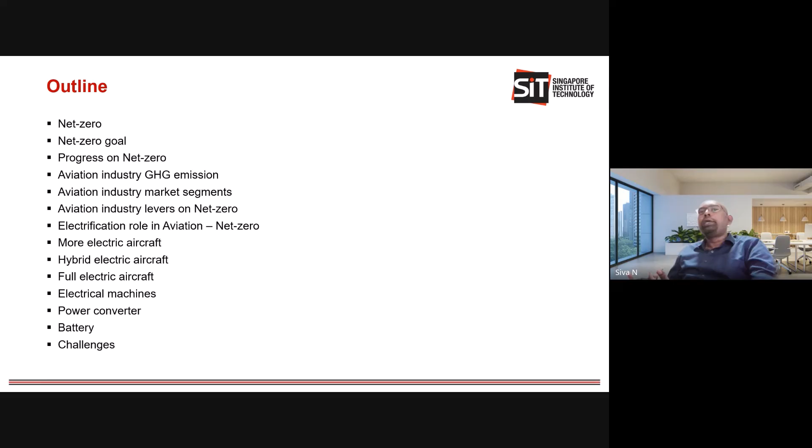Okay, so this is the outline of my presentation. First, I'd like to talk about net zero, why it is important, and following that I would like to talk about the global greenhouse emission from the aviation industry, and then the different market segments and the different initiatives that each market segment is taking to meet these net zero targets, because one solution would not work for all the different types of market segments in the aviation industry. Each market segment has its own strategy and solutions to meet the target. So I want to give a quick overview of how it's being done. Following that, I talk a bit about electrification, especially the more electric aircraft and full electric aircraft initiatives, then talk a little about the electrical machines and converters being designed for the full electric aircraft. Then I'll talk about the challenges, because delivering a product for the aerospace application comes with its own slew of challenges. So I want to give some insight into the challenges an engineer or OEM in the aviation industry faces in delivering a product for aerospace application.

Okay, so with that, let's talk about net zero. I believe most of you might have heard the keyword net zero. This has been a very hot topic in industries now. It's been there for a while, but in the last 5 years it's become more popular, and many industries and companies are talking about this. The reason is that to achieve net zero, regulations are coming. Countries are taking measures to achieve the net zero target, imposing strict regulations in order to meet it.

So companies have to adapt their products to meet this net zero target, and they're seriously looking into it. On top of that, big companies are taking it as a matter of reputation, because if they don't take measures to be more sustainable, they feel they are inferior to their competitors. So the company takes it as a measure to increase their reputation. Also, another reason is that millennials, who are a young working force in industries...

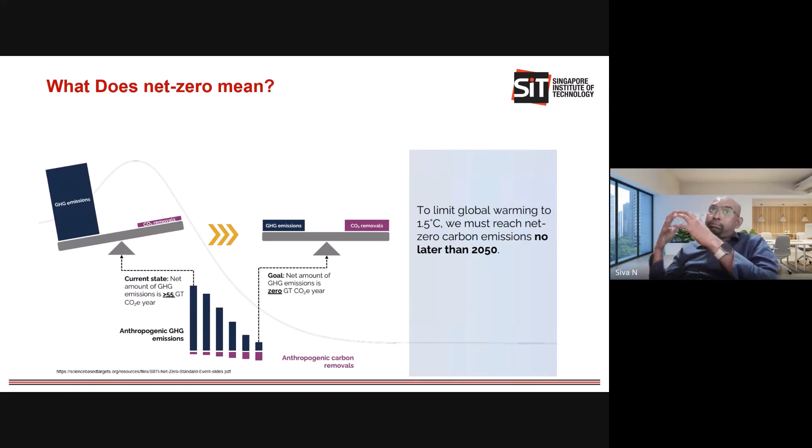That's the scenario we're talking about. Since 1850, we've had an industrial revolution, and we started emitting more and more greenhouse gas emissions, the CO2, into our environment or atmosphere. It's kind of building up. The global greenhouse gas emission keeps increasing, and CO2 removal isn't increasing significantly, because this CO2 removal comes from the forests we have, the trees that absorb CO2. That hasn't gone up significantly—it's been reducing, as deforestation is happening.

So the mechanism we have to remove CO2 from the environment keeps reducing. That's creating an imbalance now. We're emitting more CO2 and we don't have enough mechanism to absorb it. So this is the imbalance we have.

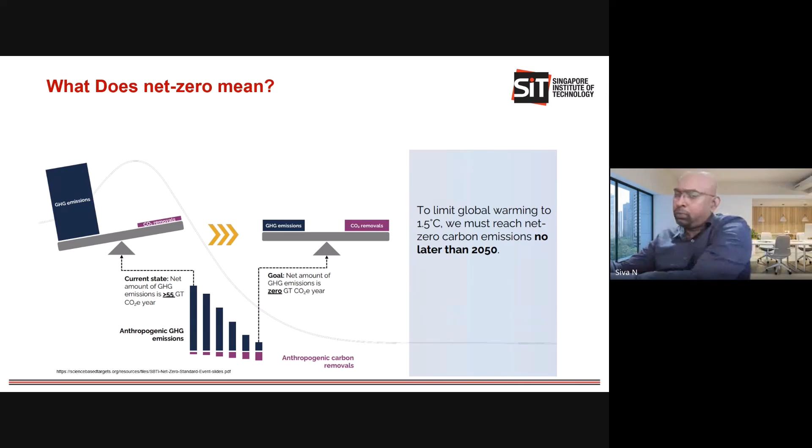If you look at the current scenario, in 2023 or 2024, emissions are about 57 gigatons equivalent of CO2—quite significant. If you don't take any action, these emissions would keep increasing. So the Paris Agreement, signed in 2015, had many countries agree to work together to achieve balance by 2050, like what you see here.

The emissions is equivalent to the carbon CO2 removal. So it's something like, let's go back to the kitchen scenario. You have a stove, wood burning to cook, but you have very small ventilation. So the removal of CO2 from the kitchen is very low, whereas the generation of CO2 from the wood is higher.

So how do you balance it? By putting, for example, an exhaust fan on the small ventilation hole, and if you increase the speed of the ventilation fan, you can suck the smoke out at the same rate as it's being generated. So you're balancing the emission and removal happening at an equal rate, and the environment becomes cleaner.

That's what we want to achieve. But the challenge is we are emitting way too much CO2, and we've been doing that. We can't suddenly find a way to suck all the CO2 from the atmosphere, because with current technology it's not possible, and even if it existed, it could be really expensive. So we need to find a mechanism to balance it.

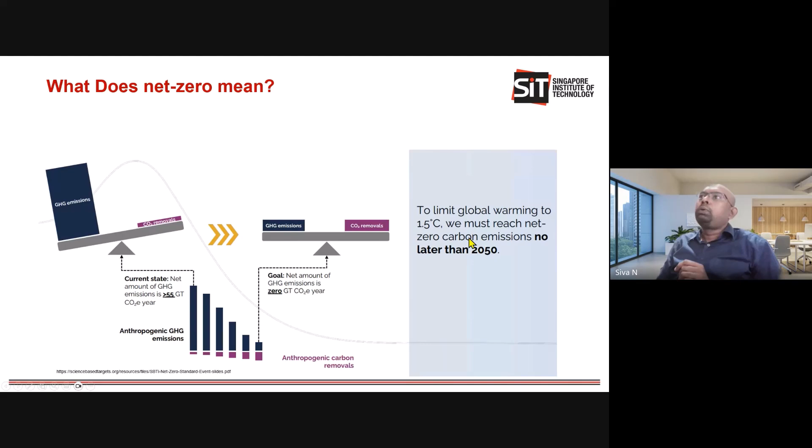The next question is why we have to do it. What net zero really means is that emission is equal to removal. If we achieve this by 2050, we would be able to limit global warming to 1.5 degrees Celsius.

From where we started the industrial revolution until now, it's already been like a 1.45 degree Celsius increase. If you don't take any measures, it would increase higher, maybe to 2 degrees Celsius in 20 years, and then maybe 3, 4 degrees in another 10 years. It will cause a catastrophic effect, because you know about global warming and its impact.

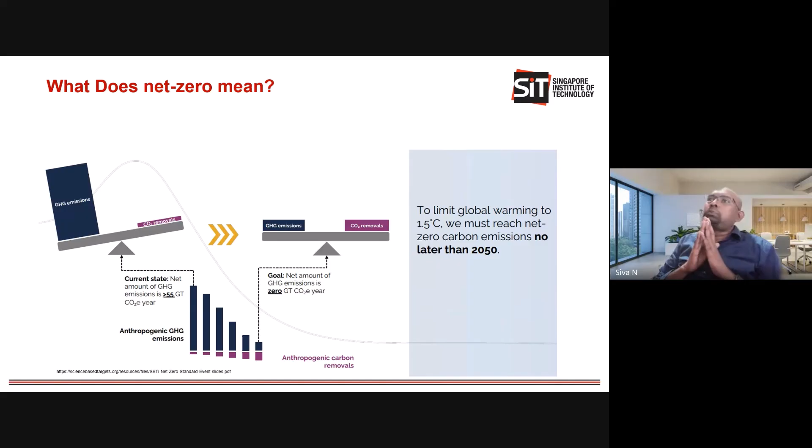So the net zero initiative is to achieve the target of limiting global warming to 1.5 degrees Celsius no later than 2050. That's what net zero actually means — we take initiatives to balance carbon, making emission equal to removal by 2050. By doing that, we can limit the increasing temperature to 1.5 degrees Celsius.

Going back to the kitchen scenario, how can we do that? We can put a ventilation fan to suck and pump the air out, but if the smoke is too high, the ventilation fan won't be efficient enough. In that case, we have to go for another way of cooking — for example, replacing the wooden stove with an induction stove, which doesn't emit any smoke, only smoke from what you cooked. Then even a small ventilation fan can suck the air out.

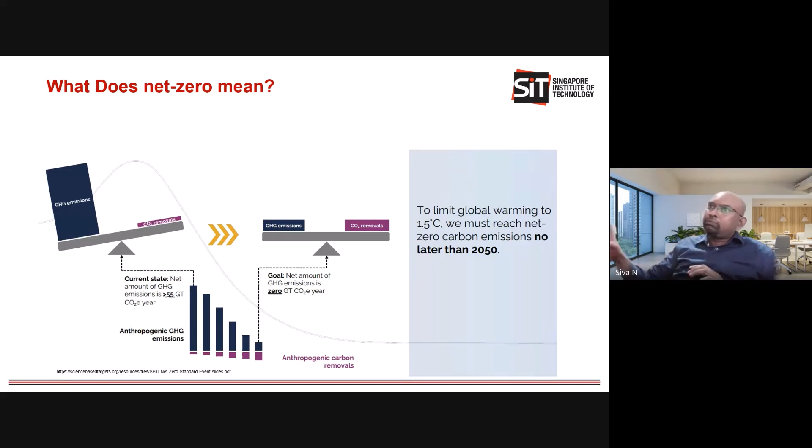That's the analogy to understand that if I reduce my emissions over the years, it's also easier for me to remove the carbon from the atmosphere. That's the balance we want to achieve.

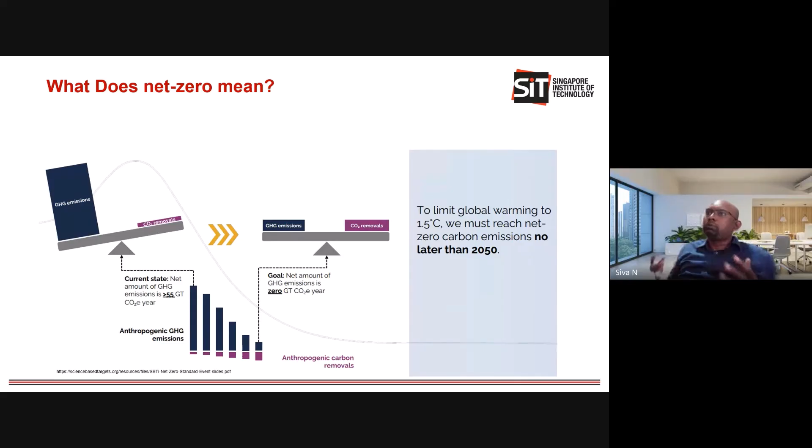I'll talk more about how to remove CO2 — what mechanisms we currently have — I touched a little on that in this slide. So, to recap net zero: the primary goal is to limit global warming to well below 2 degrees Celsius, with the more ambitious target of limiting the increase to 1.5 degrees Celsius.

Okay, so that's the primary goal that we want, the net zero goal. This was agreed in 2015 in what they call the Paris Agreement. It's an international treaty adopted on December 12th, 2015, at the 21st conference of the United Nations Framework Convention on Climate Change, the UNFCCC. Since then, more and more countries have been willing to adopt and adapt their policies in order to achieve this target.

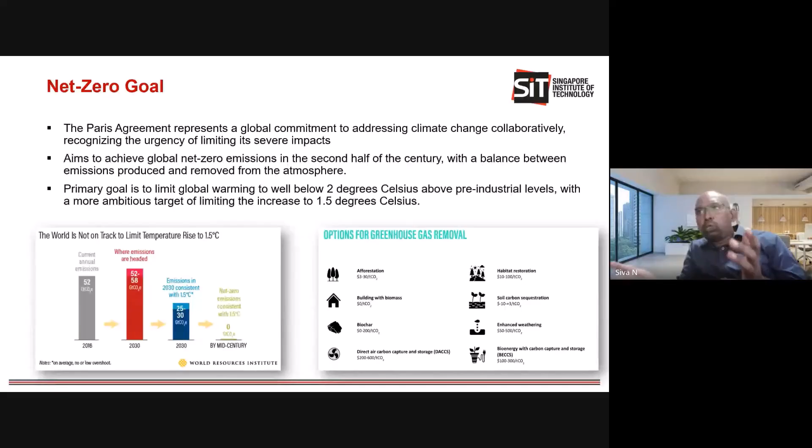And biochar is basically burning the biomass - plants or trees - at a very low oxygen level. It's called pyrolysis. This creates biochar, which has so many applications. It can be used to enrich the soil, as a fertilizer, as a catalyzer. It has many applications. So this is one way of preventing trees or plants from just burning, and instead creating char that can be used.

And direct air capture - this is again an emerging technology, and it has many rationales for being used. Direct air capture works by having big fans suck in atmospheric air, then a membrane filters the carbon from the air, and we use some solvent to dissolve the carbon, and the dissolved carbon is stored. Sometimes it's stored and used to make fuel again, because the captured carbon is mixed with hydrogen to create a hydrocarbon chain to make fuel.

That's bioenergy with carbon capture and storage - that's another technique. You can see these are all quite expensive. And then habitat restoration is another approach - creating or recreating an ecosystem that helps provide clean air, clean water, and natural pollination. That's kind of the natural way of making things better.

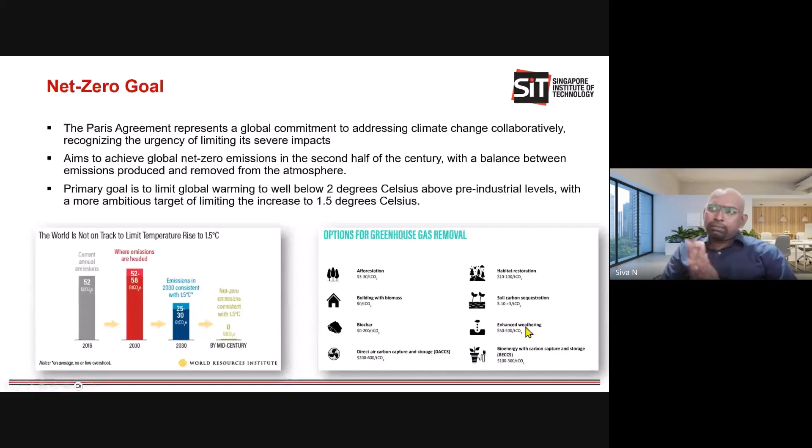Soil carbon sequestration is growing plants or trees that hold carbon in the soil, capturing carbon and putting it into the soil, and enhancing weathering. Weathering is a process that accelerates the natural process of carbonate and silicate, where the carbonate absorbs CO2 from the environment, accelerating this natural process.

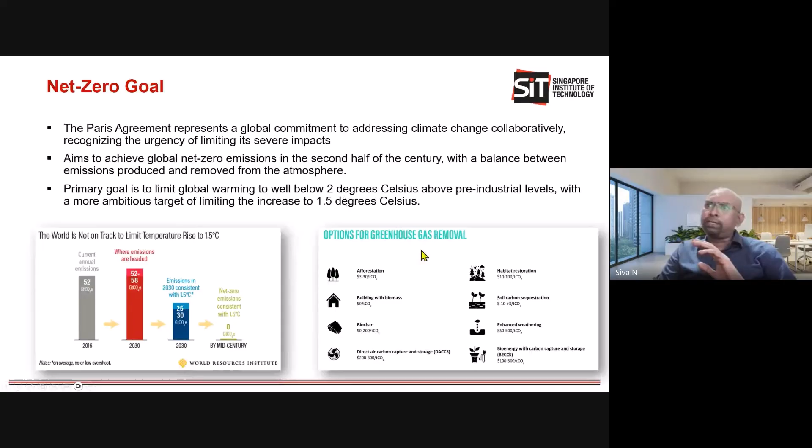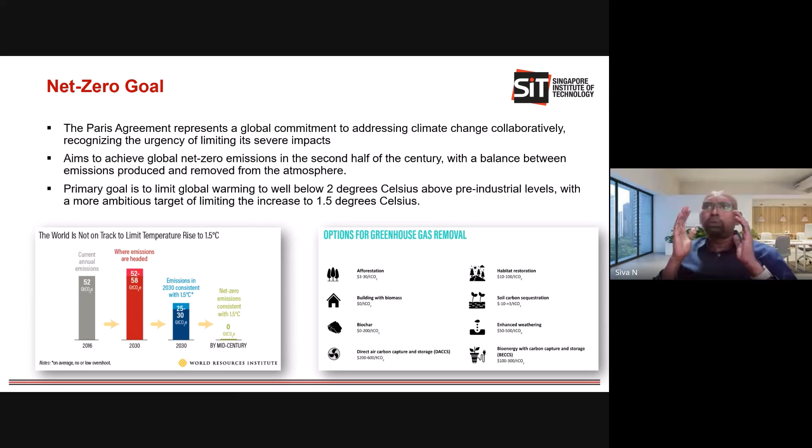So these are different techniques to capture carbon, but they are all expensive, some really expensive. It's not possible to suck out all the carbon being emitted. If by 2030 we emit 58 gigatons equivalent of carbon, we won't have the technology to capture all of it. So we have to bring emissions down so these techniques can help remove carbon and make it carbon neutral.

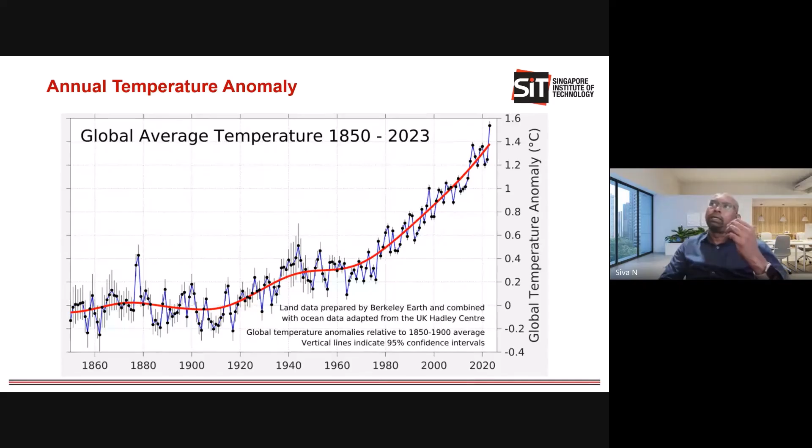This chart shows where we are from the pre-industrial revolution to now on global warming. This is the annual temperature anomaly. We can see that from 1860 the anomaly was around 0, but it's been increasing, and last year it was around 1.45. That's the anomaly we're seeing, an increasing temperature. If we don't take measures, it will go higher and trigger many other disasters.

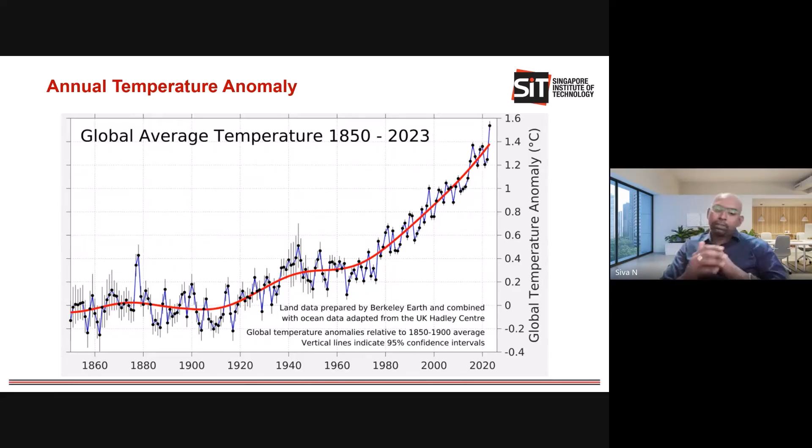That's the reason net zero is important. So we've talked enough about net zero, and countries are really taking it seriously.

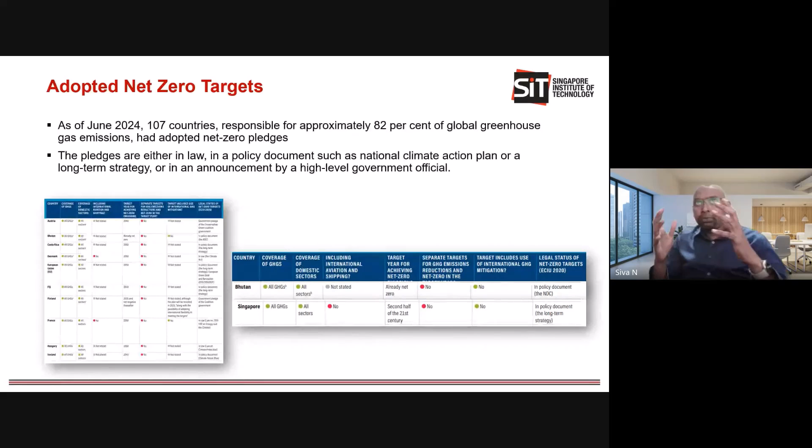As of 2024, more than 100 countries, responsible for 82% of global greenhouse gas emissions, which are the main contributors, have agreed to adopt net zero initiatives, enforcing laws, changing policy documents, or making long-term strategies.

These are some examples of what countries are doing. Since we're in the Asian region, looking at our neighboring countries, Bhutan covers the domestic sector, all sectors. They have policies implemented to take the net zero initiative, and they claim to already be net zero, meaning emissions from domestic sectors are absorbed through some mechanism, maybe more forests or other mechanisms we need to learn about.

Singapore is also very proactive. They claim that by the second half of the 21st century they want to go net zero, excluding aviation and shipping, but for other sectors they want to achieve net zero by the middle of the second half of this century. So different countries are implementing policies to achieve net zero targets.

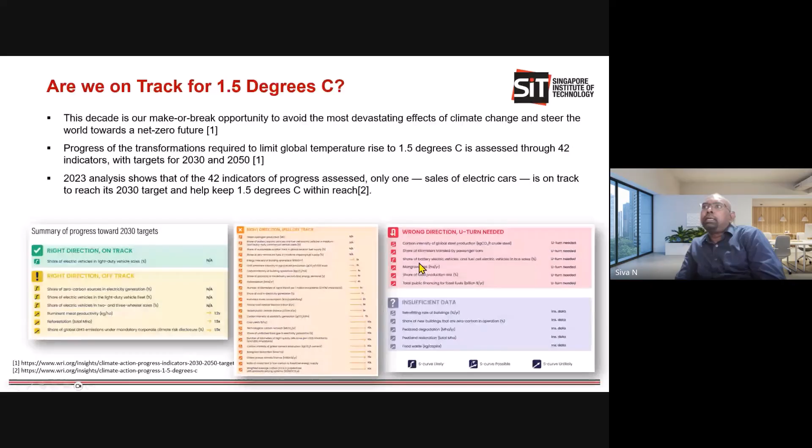Some indicators are going in the wrong direction. For example, global steel production is supposed to reduce the intensity of carbon emissions, but they are actually emitting more. This is a U-turn, not going in the right direction of reducing emissions, but instead increasing them. So this is the status now, and it's one of the main reasons companies and countries are imposing strict laws and policies.

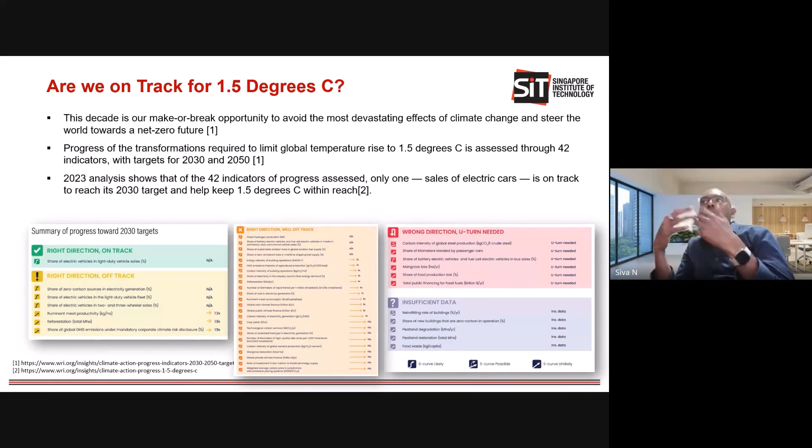So when countries impose laws and policies, it eventually translates to economic reformation, and that in turn has an impact or forces companies to change their products, to take the initiative in order to reduce CO2 emissions, either what their product emits or the CO2 emission they have in their production or manufacturing.

Okay, so with that note, let's look at who is contributing, and what are the contributions, what are the different industries that contribute to the level of CO2 emission. As of 2023, the recorded emission is about 57.1 gigatons equivalent of CO2. The energy sector, the power sector, is the key contributor at about 26% of emissions, and the next big one is the transportation sector, which emits about 15% of global CO2 emissions, with the rest from other sectors.

Since I'm talking about aviation, let's look at the transportation industry. You can see road transport, sea transport, and air transport. Aviation is part of air transport, and it makes about 2% of global CO2 emissions. So out of the 15% from the transportation industry, 2% of it is coming from the aviation industry, which is significant.

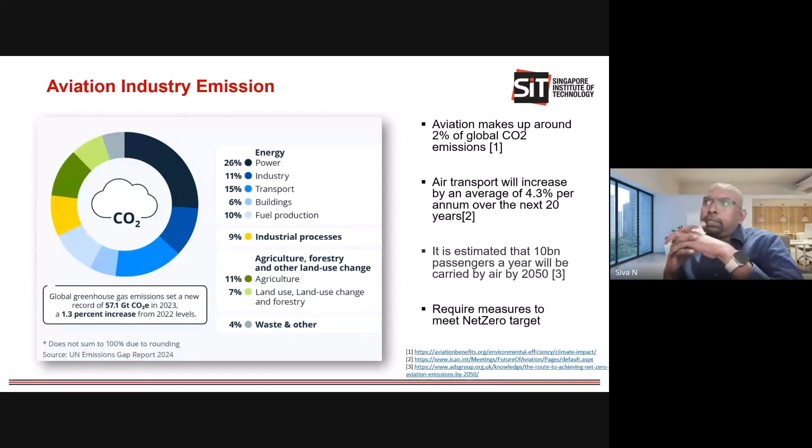It may not look significant, but if you look at the way air transportation is growing, it's growing at 4.3% per annum over the next 20 years. That's the kind of prediction we have, so this is significant growth in air transportation. It's estimated that about 10 billion passengers will be traveling in a year by 2050. This is a significant increase in the volume of passengers using air transport, so there will be more emissions that may come. Over the years, the emission may be more than 2% of global CO2.

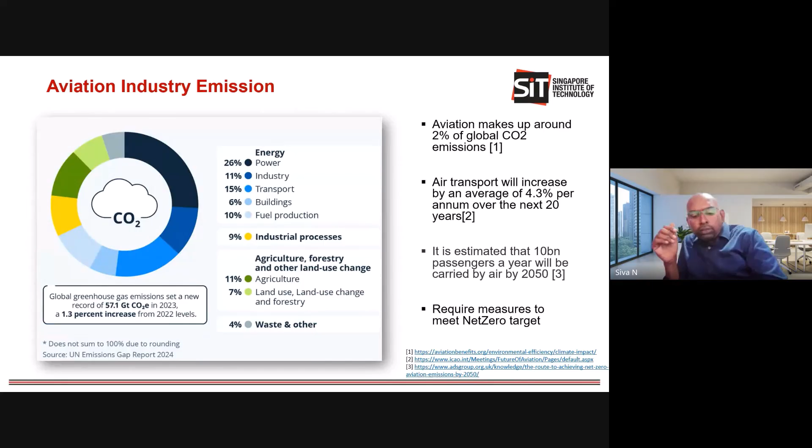So definitely this industry requires measures to meet the net zero target. Let's look at what levers the aviation industry has in order to reduce CO2 emissions to meet or assist in meeting the net zero target. But before that, we need to look at the different market segments in aviation.

These are the 5 categories or segments in aviation. Actually it's not a strict market segmentation—some use 4 market segments, some 5. Here I'm showing the one with 5 market segments, based on the size of the flight. Urban air mobility, UAM, includes vertical takeoff and landing vehicles and air taxis. It's a very short range flight with a 4 or 6 passenger aircraft.

Commuter aircraft is slightly bigger, with 9 to 50 seated aircraft, and it travels more than 100 kilometers. Then regional is 50 to 100 seated aircraft, medium haul is around 200 seated aircraft, and long haul is more than 250 seated aircraft.

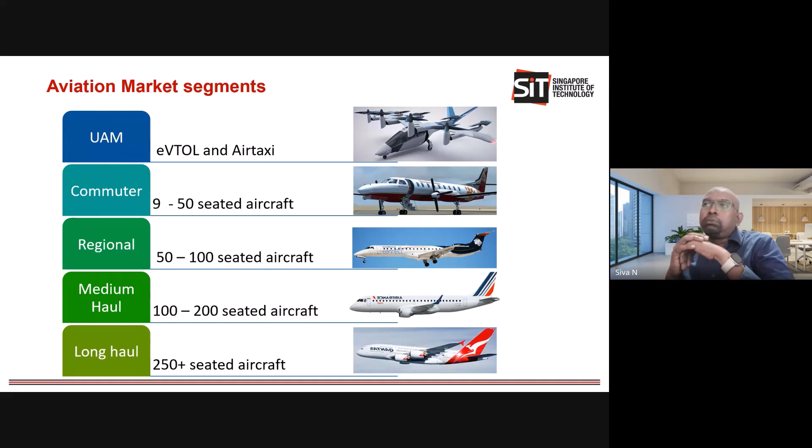So these are the different categories of segments in the aircraft market, and as the size of aircraft used in these market segments differs, the power requirements are different. So one strategy or initiative for CO2 emission reduction would not work for all—that's why we need to look at different levers to reduce CO2 emissions from different market segments.

Okay, so let's look at the levers that the aviation industry has in order to reduce greenhouse gas emissions from the industry to achieve net zero. The first is improving technology. The aviation industry has been around for about 100 years, and they have been improving and growing, but now we want to achieve the CO2 net zero target, we need to take some step improvements in the measures or the way it's been looked at.

So the low hanging fruit is improving fuel efficiency. Fuel efficiency can be increased because fuel consumption is based on the payload—how heavy the aircraft is. So by looking at avenues to reduce the aircraft weight and the power consumption in the aircraft, we would be able to increase the fuel efficiency of the aircraft. Basically, by reducing size, we can increase fuel efficiency.

So that's the avenue that the existing industry, the OEMs, are looking at in order to improve efficiency. And then adapting the next generation technologies like battery powered propellers, hydrogen fuel cells, or innovative aircraft designs.

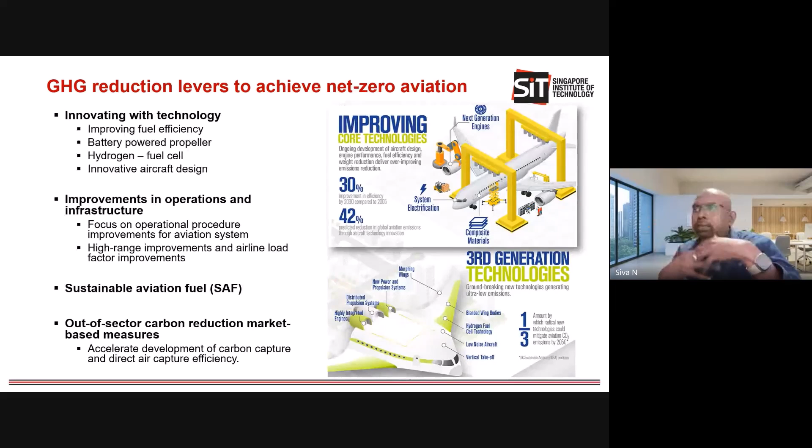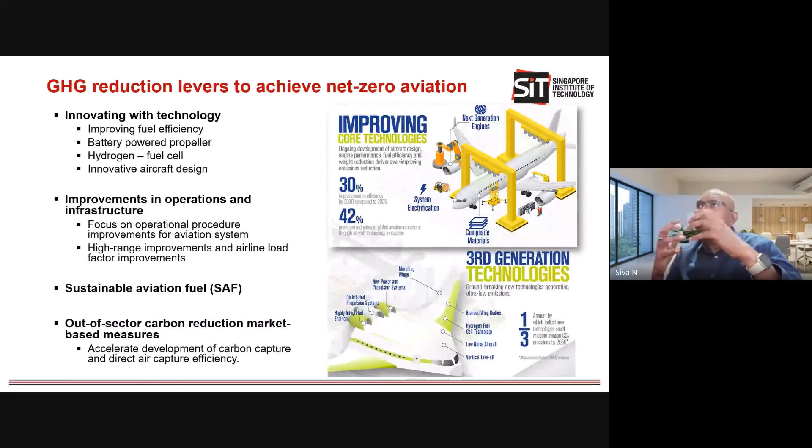That's one lever they use: innovation with technology, to increase efficiency and performance, reduce energy consumption, or enable use of clean fuel. The second lever is improvements in operation and infrastructure, looking at the fleet level - how airlines can operate aircraft more effectively, increase utilization, and improve load factor. For example, airlines can work together to share aircraft to increase utilization. This is some of the strategy being taken by different airlines, adapting AI and predictive maintenance and other forecasting techniques, all put together to optimize operations. That's the other lever they use to reduce CO2 emissions from the aviation industry.

The other one is sustainable aviation fuel - a topic by itself. For a long haul or medium haul aircraft, which is a big aircraft, bringing electrification may bring a slight marginal benefit, but it won't bring significant benefit because the technology is not there - the battery technology is not there.

Or even the motor technology, or the power density we're looking at on the motor or battery, is not there to completely electrify long haul or medium haul aircraft. So one avenue to look at is, how can I change my fuel? Currently kerosene is used to power the aircraft. Can I go for an alternative fuel that will emit less emission or zero emission? Right, that's what sustainable aviation fuel is talking about.

It either uses biomass to create the fuel, or uses a synthetic approach - do electrolysis, break down water into hydrogen and oxygen, and capture carbon from the atmosphere. Take the carbon from the atmosphere, take the oxygen and hydrogen from electrolysis, put them together to create a carbon-hydrogen chain to create fuel. That's synthetic fuel that can be created and used in aircraft, which is cleaner - I mean, may not be cleaner, but it's that we're not pumping crude oil from the ground and burning it and emitting carbon. It's more like we're capturing carbon, creating the fuel, and emitting the carbon again in the atmosphere, so it's neutralizing the carbon emission.

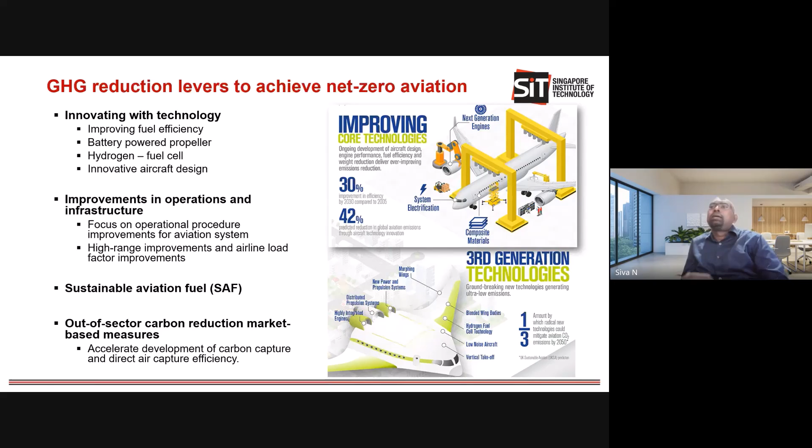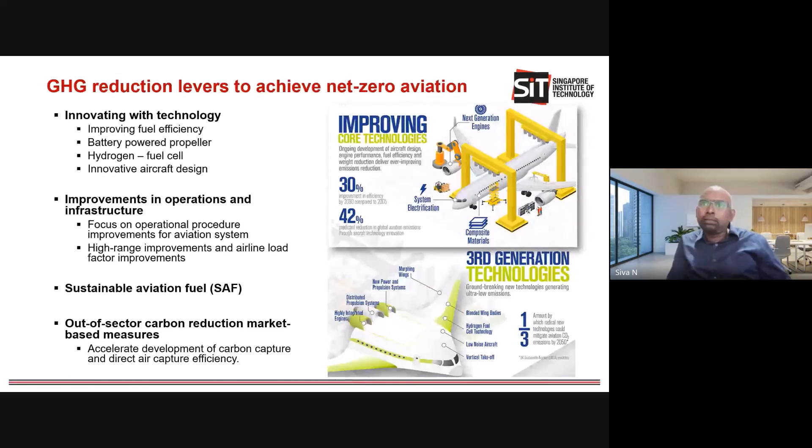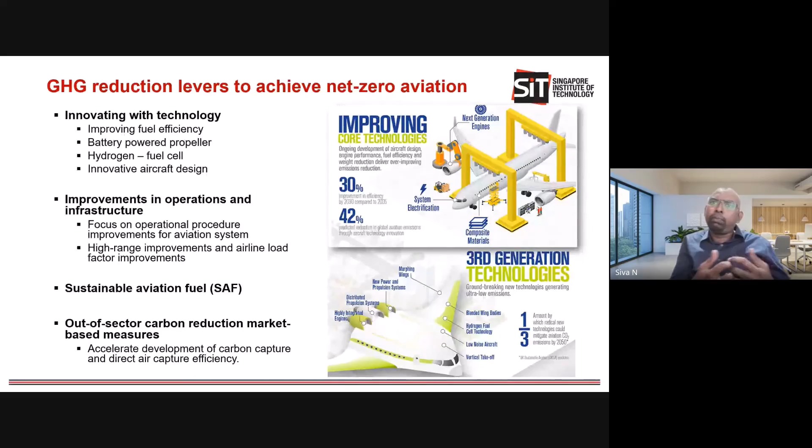Then there's out-of-sector carbon reduction, a market based measure. This is where the aviation industry invests in other technology like carbon capture, direct air capture technology - essentially buying carbon credits. They invest in or buy companies which capture carbon, so whatever carbon is emitted by their product, they use this out-of-sector carbon reduction technology to suck carbon from the environment, then store it or use it for other purposes. So this is another way of reducing overall emission. These are the different levers they have.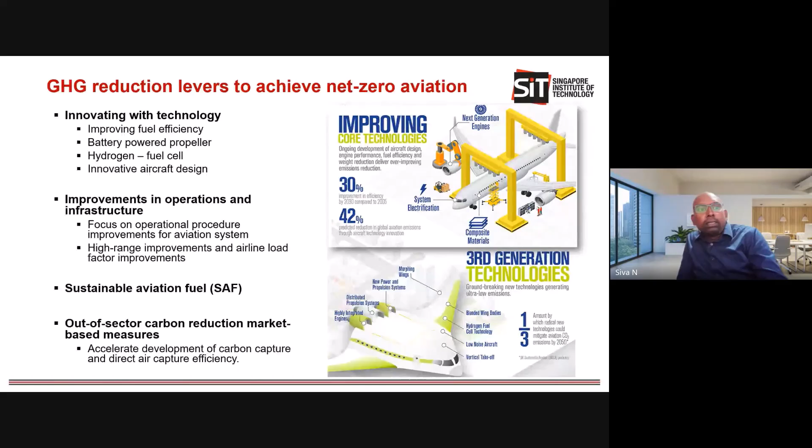Okay, so now let's look at innovation with technology. As I mentioned, increasing fuel efficiency is key - one way to reduce CO2 emission - because if you increase the efficiency of the gas turbine engine, which you see here, by 1%, each aircraft would save about $100,000 or $200,000 per year.

So if airlines have 10 or 20 aircraft, the savings could be in millions. The savings on fuel will be in millions, and then you can think about the CO2 emission savings from that fuel. So that's why companies are putting more effort into making the next generation engines more efficient.

The other approach they're taking is composite material, because as I mentioned, if we reduce the aircraft weight, the overall fuel consumption would reduce. So instead of using conventional material, can we go with some composite material which is lighter and more rugged? A lot of material research is going on to see how we can reduce that, and that's another measure the industry is taking to reduce the overall weight of the aircraft.

And the other approach is electrification, which I'll talk about in later slides. Electrification helps us reduce the weight of the aircraft, because it could help us remove the existing hydraulic and pneumatic systems in the aircraft.

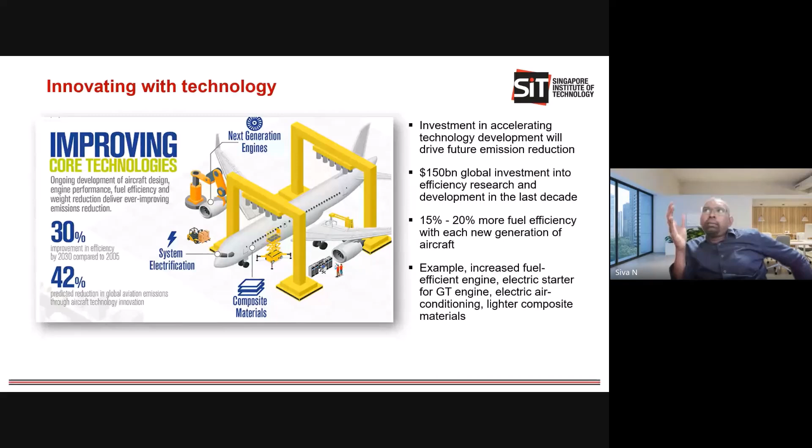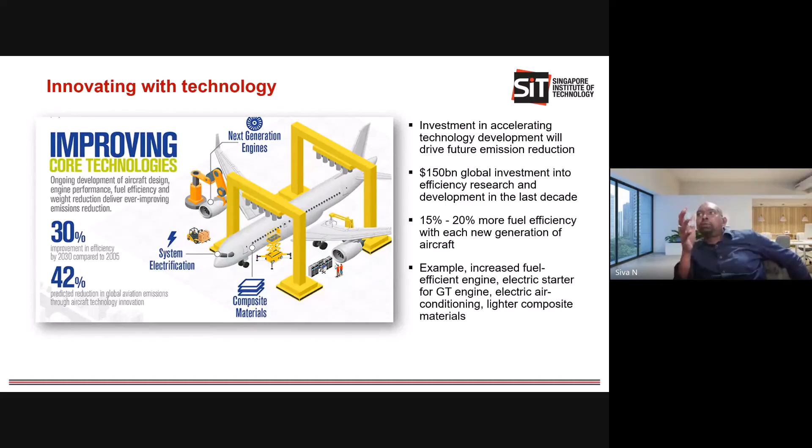Currently, about 150 billion in global investment is going into research to increase the overall efficiency or fuel efficiency of existing aircraft, or the next version of conventional aircraft. This will help us implement all these measures - electrification, composite material to reduce weight, and increase the efficiency of the engine.

If you do all these things, we will be able to see some improvement in efficiency by 2030. That is the target. That would translate to a predicted reduction in global aviation emissions by 40%.

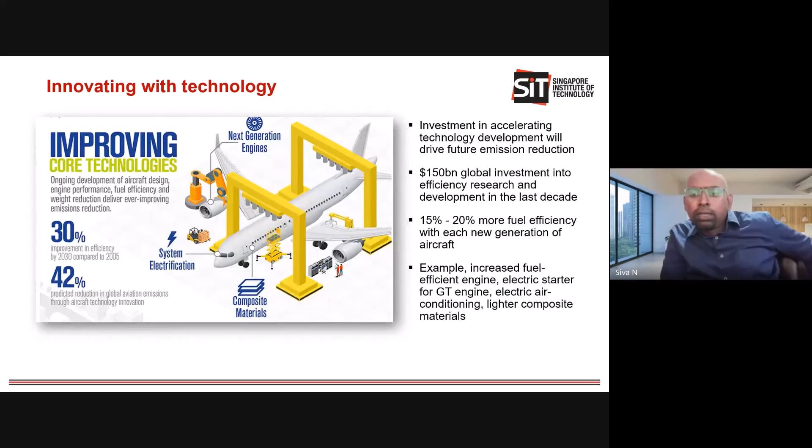So that's the innovation with technology. Now let's talk about electrical technology. This is interesting, you can see that.

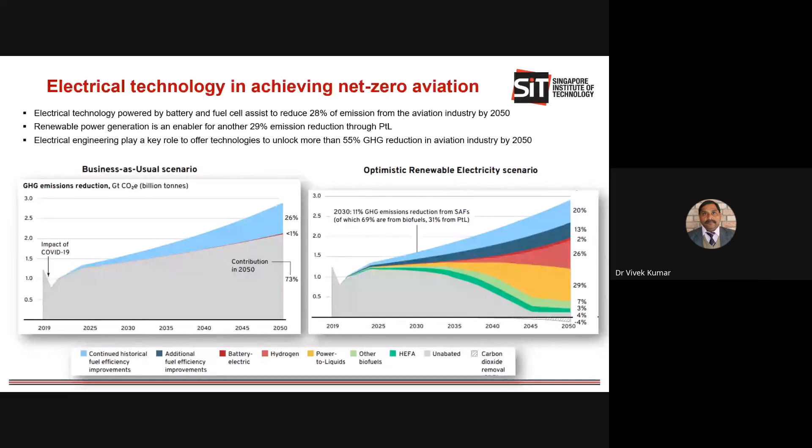For example, this is where we are now, around 2025. This is the emission from the aviation industry, about 1.25 gigaton CO2 equivalent emission. If you don't take any measure, by 2050 the emission would maybe double. We may see some reduction if you pursue the natural improvement that we can achieve through the OEM, like using lightweight material or energy efficient engines, but this is still significant.

But if you want to achieve net zero emission in the aviation industry, this has to be far lower, so that we can bring some carbon capture technology to nullify the emission. This is not possible if you don't take any measure, whereas if you take some measures, we would be able to achieve that.

You can see in this graph, the gray line shows that if you take various measures, the overall emission will be only 4%, maybe less than 0.2 gigaton, and then we can have a carbon capture mechanism to capture that, nullifying the emission with carbon capture. These are the measures that could help us achieve net zero by 2050.

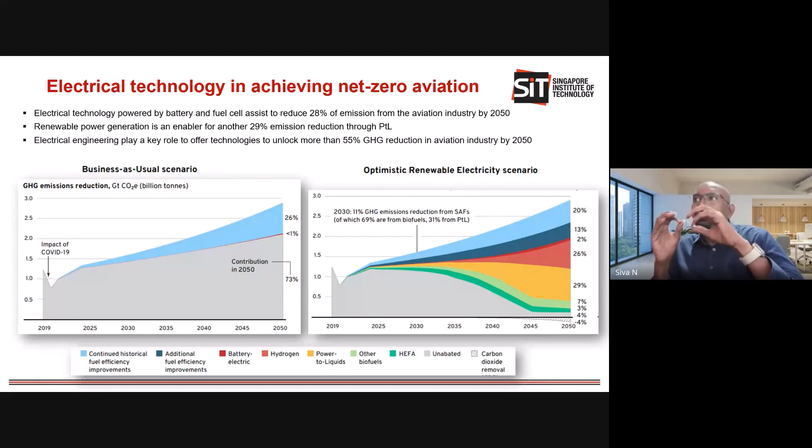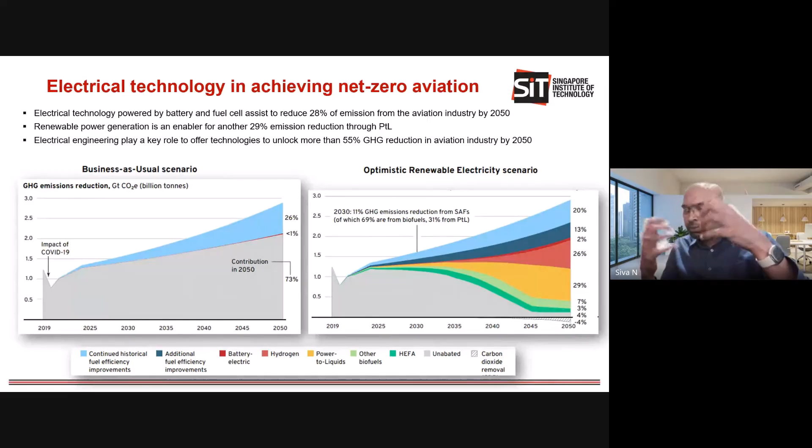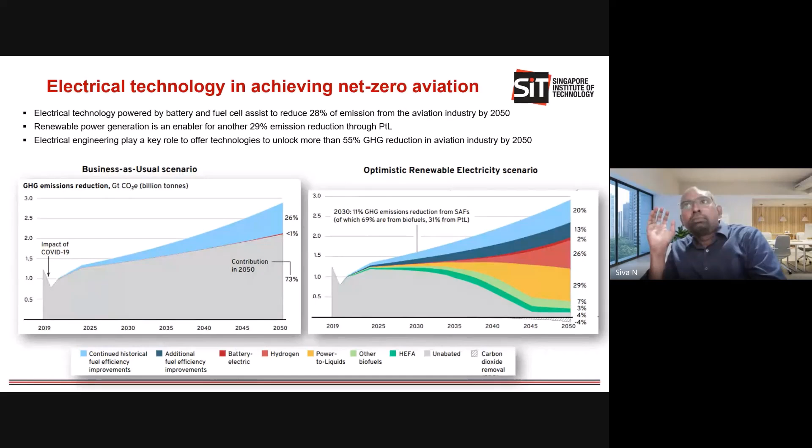I believe most of you in this call are electrical engineers. Each and every electrical engineer has a crucial role or opportunity to play in achieving net zero CO2 emissions. The aviation industry is just one example where 55% of emission reduction relies on electrification, and if you look at efficiency gains too, more than 60% of the reduction can be enabled by electrical technology. This is just for the aviation industry. If you look at other industries like marine or land-based transport, the role electrical engineers have to play is even higher. So please be proud to be an electrical engineer in this era.

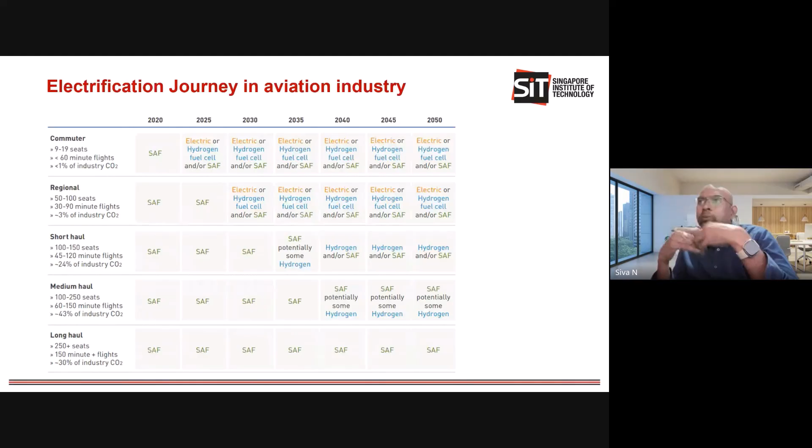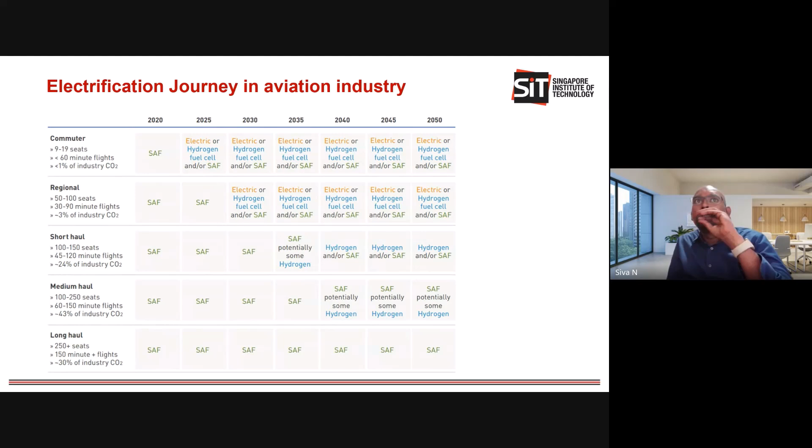Now let's look at electrification. I told you these are different market segments, how the aircraft market has been classified, and different strategies have to be adapted because the electrical and battery technology is not there yet to fully electrify long haul or medium haul flights. So for medium and long haul flights, the net zero initiative will mainly rely on SAF, sustainable aviation fuel, until 2050. Whereas for commuter, regional, or short haul aircraft, electrical propulsion using battery technology, or propulsion using hydrogen fuel cells that generate electricity for electrical propulsion, will play a role from 2025 onwards.

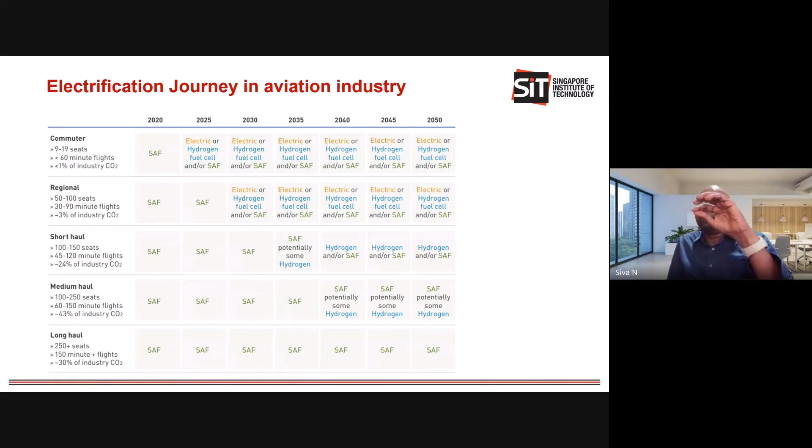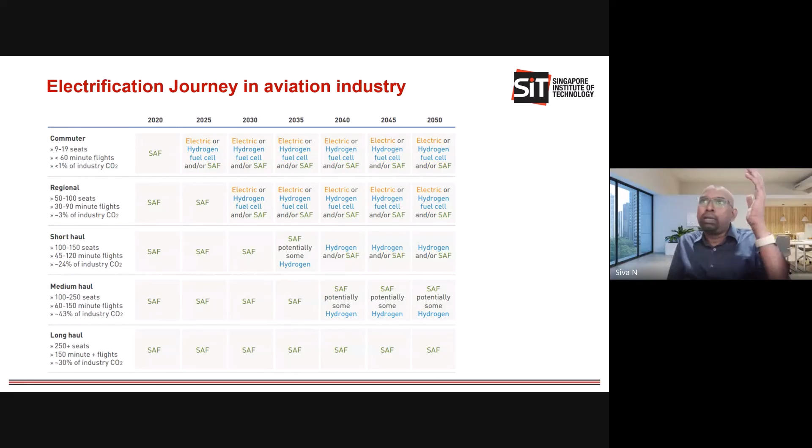Now let's look at aircraft electrification - how does electrification help aircraft reduce CO2 emissions? There are three categories for electrifying aircraft. One is the more electric aircraft, which uses a conventional aircraft engine to fly, but some key components and systems that currently use hydraulic or pneumatic power could be replaced with electrical motors or power converters.

Electrical drives, basically. For example, hydraulic systems are currently used to control the wings - you can see actuators used to lift the wings during landing and takeoff, and also the landing gears. The gas turbine engine has compressor blades and turbine blades where the angle of attack has to be adjusted to control power, so hydraulic actuators are used to change the vanes in the compressor and turbines. This can be replaced with electrical drives - that's the electrical mode. Electrifying certain systems in the aircraft provides weight savings as well as increased energy efficiency. That's the focus of the more electric aircraft.

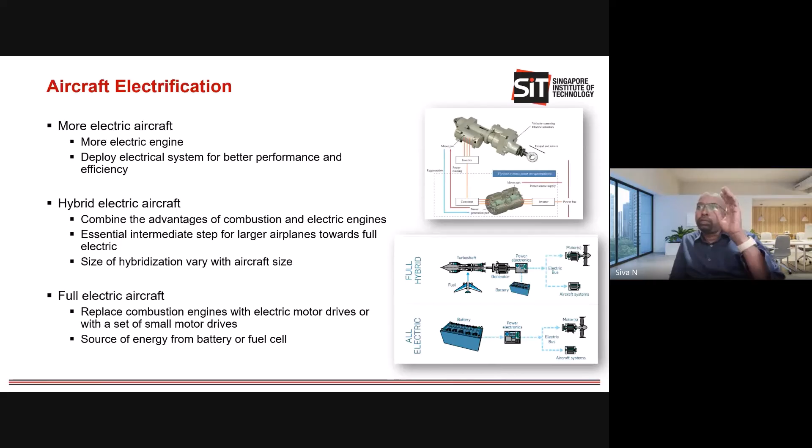The hybrid electric aircraft is very well known - similar to the hybrid electric vehicle, where we use both the power of the engine and a motor powered by battery to assist propulsion. A fully electric aircraft relies fully on stored power in the aircraft to drive motors, and a purely electrical motor is used for propulsion.

So, for example, in the automotive industry, to start an engine, we use an electrical motor. But in the aircraft, to start the gas turbine engine, they use pneumatic systems. This means they have a small engine on the tail of the aircraft. They start that engine first, and it sucks in air, which is then pushed through a pneumatic channel, a pipe, that brings the air to the blades in the main engine. The blade starts rotating, building pressure in the combustion chamber, and then they ignite. That's how they currently start the aircraft. The pneumatic system, providing the channel and the auxiliary engine at the back to create air pressure, all adds to the weight.

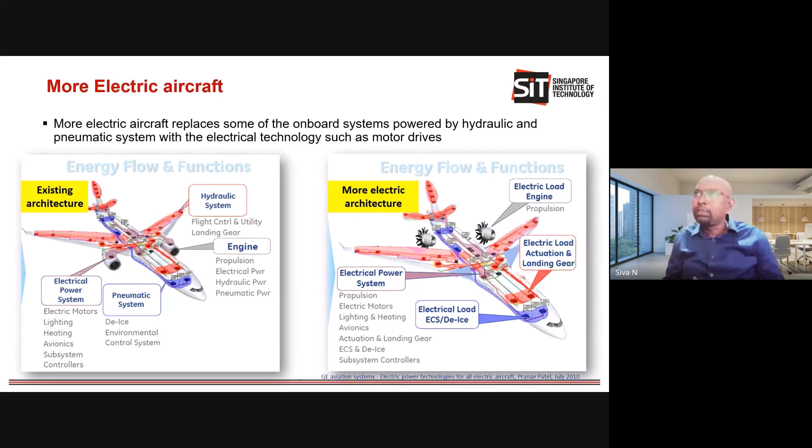So these are some of the things happening currently. There's a lot of research going on in order to make these things happen, to increase the efficiency of the aircraft and reduce the weight. That's the kind of focus of the more electric aircraft concept.

The hybrid electric propulsion has two categories: serial hybrid and parallel hybrid. In the serial hybrid, the motor is the one driving the aircraft. The engine is used to generate electricity, and the generated electricity is then used to power the electric motor. If you need more power, the battery will also supply the power.

In parallel hybrid, both the motor and the engine are coupled together, and both assist to provide the propulsion power.

The hybrid electric system reduces fuel consumption up to 5% compared to the standard flight, and this could be higher - you can go as high as 10% for the helicopter, generally, which is lighter than the fixed wing aircraft.

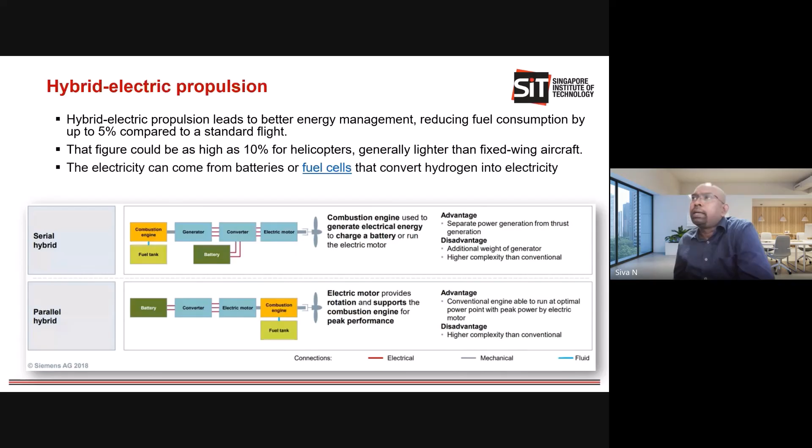This is just to show some of the activities in the industry. As I mentioned, the aviation industry is taking various measures to achieve net zero by 2050. So companies come together, like Airbus, which is the airframer, and Rolls-Royce and Siemens, which are OEMs. They came together and had a project called E-Fan X.

The idea of this project is that they're creating a hybrid system, because each company has its own strength. For example, Rolls-Royce has the small engine, and they can make the engines even lighter, designed for a small application. They developed the engine just to drive the generator to generate electricity. So they contributed the generator, the engine integrated to make the generator, and they built a power converter.

Siemens basically replaced one of the gas turbine engines with a motor and a fan. As you know, Siemens is an electrical company - they're strong in electrical - so they came with the propulsion motor and the power converter.

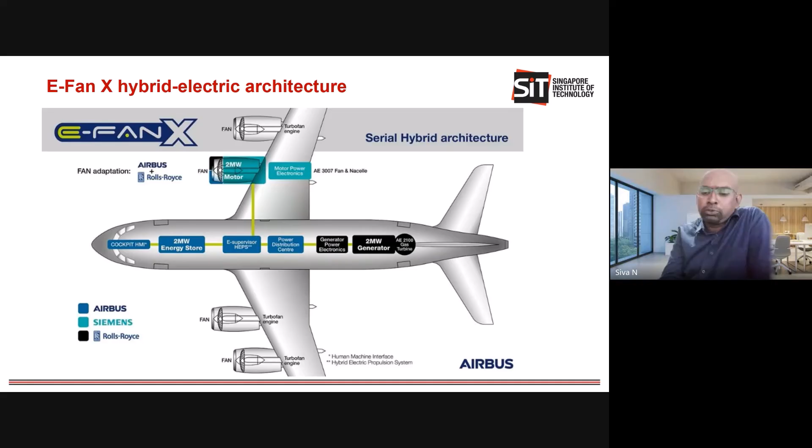Airbus provided the energy storage system, the user interface system, and the supervisory system. They put it all together and developed a demonstrator to demonstrate the hybrid electric system. This demonstration happened 2-3 years back. So that's the companies coming together and working to demonstrate the concept.

Full electric aircraft, which is a short range aircraft with a very limited number of passengers, like 4 to 6 or 10 passengers, is categorized as urban air mobility. This market segment is predicted to be booming very fast, because the prediction says that by 2050, in 25 years, two-thirds of the world population will live in cities - that means around 66% of the people will live in cities.

So we can see how the cities are crowded. The roads are being expanded and stretched, and packed with vehicles during peak hours. So if your population is increasing in the cities, the land transport, which is already stretched, may not be able to handle the commuting - it may be affected.

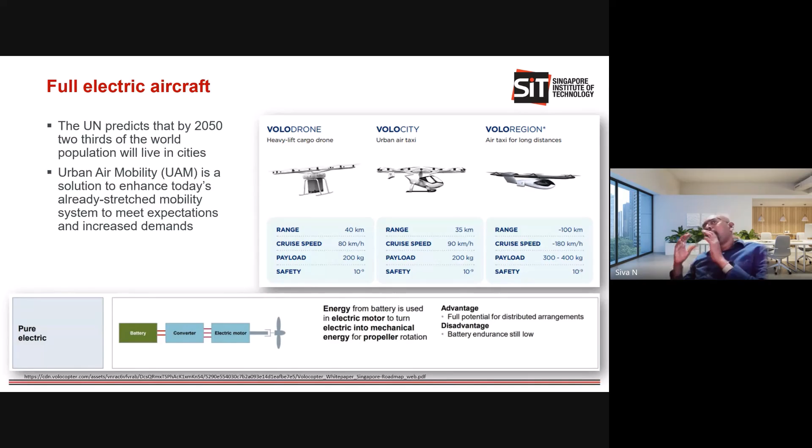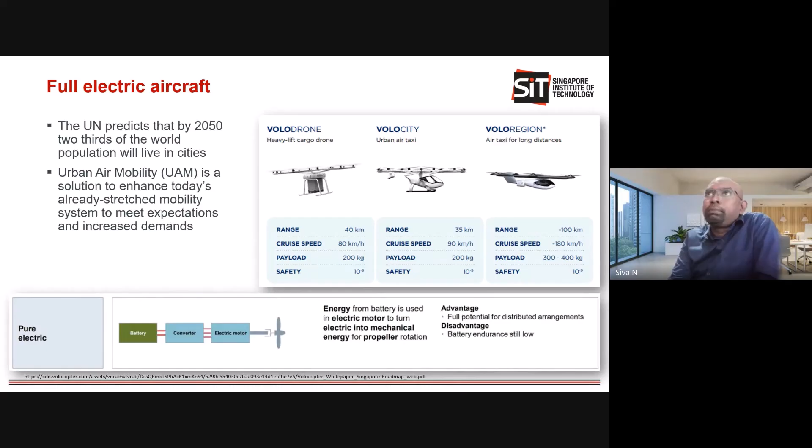So they predicted that the flying taxi or air taxi is the kind of solution for it. The aviation industry predicted that maybe in the next 10 or 20 years, or maybe next 5 years, we may see this air taxi flying. This is a different ball game by itself, because it's purely based on electric propulsion - the energy storage system and the electric propulsion. This is currently the focus in many companies, and many startups have been working on developing, building, qualifying and certifying the full electric aircraft.

So what are the primary or key components in the full electric aircraft? It's the electrical motor or electrical machines, power converter, and battery. The electrical machines already have very good efficiency, over 95% efficient, which is more efficient than the combustion engine, which is around 50%.

But the challenge is that with aircraft, there's a weight and space constraint. Anything that goes into the aircraft should be lightweight and smaller in form factor. So the research for building electrical machines for aircraft is primarily focusing on how we can make the electric machines more compact, and how to increase the power to weight ratio.

The power to weight ratio they're targeting should be more than 13 kilowatts per kilogram. State-of-art motors can achieve a power density of about 8 to 10 kilowatts. So they're pushing the boundary - reducing the weight of the motor and increasing the power rating.

That's where a lot of research is going on - the materials, the machine configurations, and integrating the machine and power converter together in order to reduce the overall drive weight. A lot of research has been going on, and some companies have successfully demonstrated high power density motors as well.

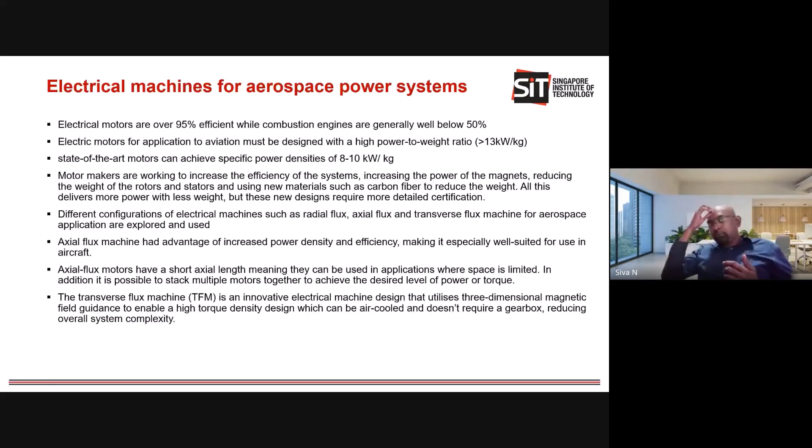In the axial flux machine, the rotor and stator are stacked together. So if you want to increase the power, they can stack the stator and rotor - it's kind of a modular sort of thing, instead of going with the conventional radial flux machine with a fixed stator and fixed rotor. This axial flux machine provides flexibility to increase power by stacking the stator and magnet layers.

So the aircraft OEM manufacturers have already built commercial axial flux machines for aerospace applications. Companies like Rolls-Royce looked at a different configuration, the transverse flux machine, because they want to utilize the three-dimensional magnetic field to enable high torque density. The transverse flux machine has both radial and axial fluxes, so they utilize both to increase the power density.

Since these machines need to be lighter weight, the cooling has to be simple - it is air cooled, so the power density can be increased. If it is liquid cooled, when calculating the power density, they have to consider the weight of the cooling system as well. So if the machine is designed in such a way that it can be easily cooled using air cooling, it will help reduce the weight and increase the power density.

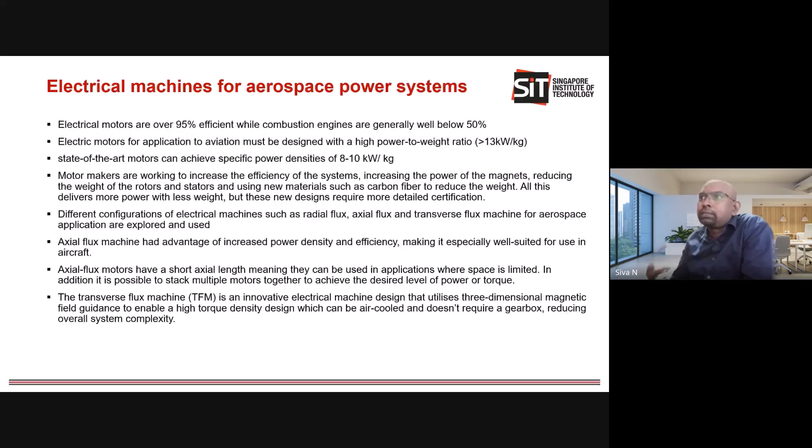In this transverse flux machine, since the windings are not inside the stator but stacked on the surface, it is easy to cool. That's one of the reasons they have gone for this machine. This is the transverse flux machine that Rolls-Royce designed - it is currently in the prototype stage.

So this basically produces a three-dimensional magnetic field, as you can see here. This is the prototype they have, and the commercial product would look something like this. You can see the size of the machine, which is quite compact, and in some cases it will be integrated with the power converter.

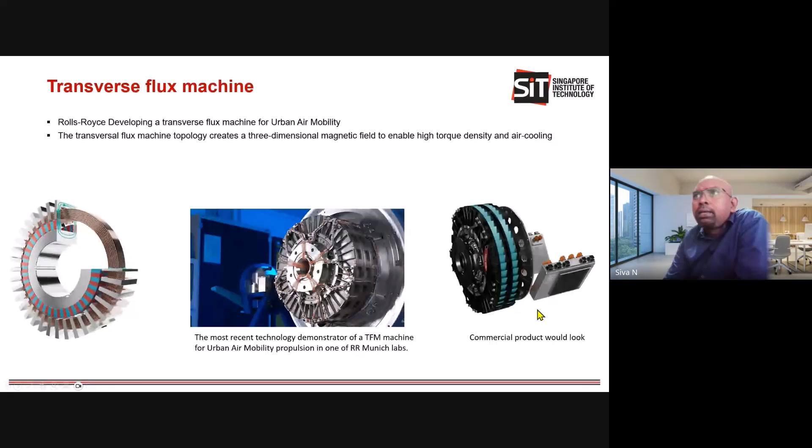This is the power converter that you can see. Another company, magniX, has designed and developed the axial flux machine, where the stator and rotor are stacked together, so the overall width of the machine is much lesser compared to a radial flux machine. The advantage of this is for eVTOL applications, vertical takeoff, since this machine is easy to integrate. Because of this structure, it is easy to install the fan, making it more convenient and reducing drag.

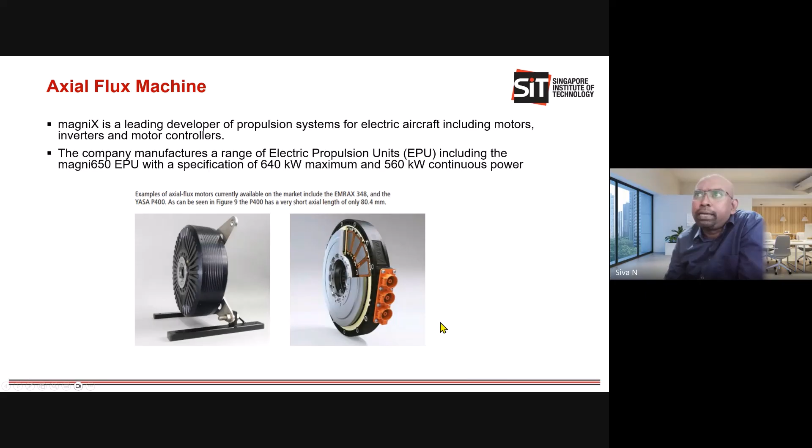The power converter is again crucial for the aerospace industry. If you look at electrical drives, the machines are a bit rugged - even with a fault, they can still run for some time. But when it comes to the power converter, it's a weak link in the electrical system. If the power device fails, the converter may not be useful to power the motor, because the voltage may become unbalanced, so it's not in favor of powering the motor.

So a lot of research has gone on selecting the suitable device for the power converter for aerospace applications. Currently, silicon carbide technology has matured quite significantly, and is currently being used in some of the prototypes being designed by Rolls-Royce and other companies.

The challenge is that the power device, at high altitude, is exposed to some cosmic radiation - that's one of the concerns the industry has. The reliability that manufacturers quote for the device is mainly based on land-based applications. If they need to be used in aerospace applications, the component has to be derated. So some of the failure modes of these components are unknown, because power converters have not been widely used at high altitude for high switching frequency applications.

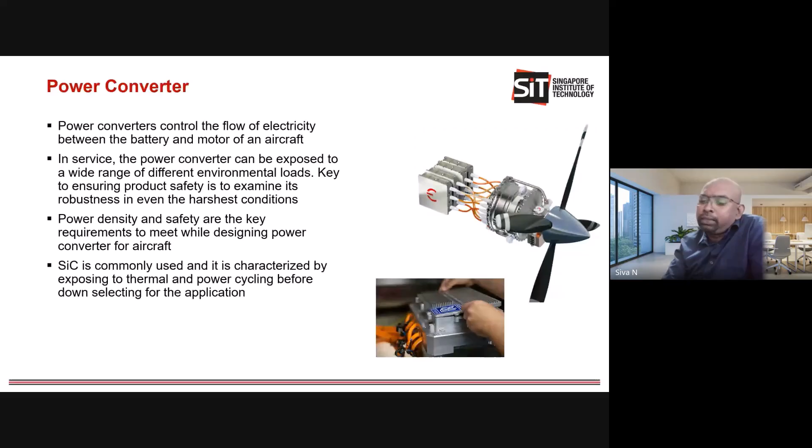That's one of the reasons the industry is taking a multi-lane approach. For example, this is one machine, basically to drive the propeller, but you can see they have about 4 lanes - 4 power converters - to drive the electrical machine. So even if one power converter fails, the other 3 power converters can still drive the propulsion motor. That's the approach the industry is taking. This is the prototype which Rolls-Royce is currently developing.

The picture is not very clear, but it shows the fundamental frequency is 2.5 kilohertz, the efficiency is 99%, the power is 100 to 200 kilowatts, and the voltage can go from 500 to 900 volts.

Now, the battery technology - as most of you may be aware, the current energy density we have may be suitable for the air taxi application, but when it comes to cost, it's not economical to operate. That's a conclusion made by some aircraft airframers who were looking to develop electric air taxis.

So for UAM applications, like urban air mobility air taxis, the current energy density may be sufficient. But if you want to electrify regional passenger aircraft that fly around 100 kilometers with more than 10 passengers, that may not be possible with current battery technology. It may only be possible if battery technology provides an energy density of 500 watt-hours per kilogram, but that may not be available before 2030. That's one reason the industry is now looking at fuel cells as an option for electrical propulsion rather than battery technology.

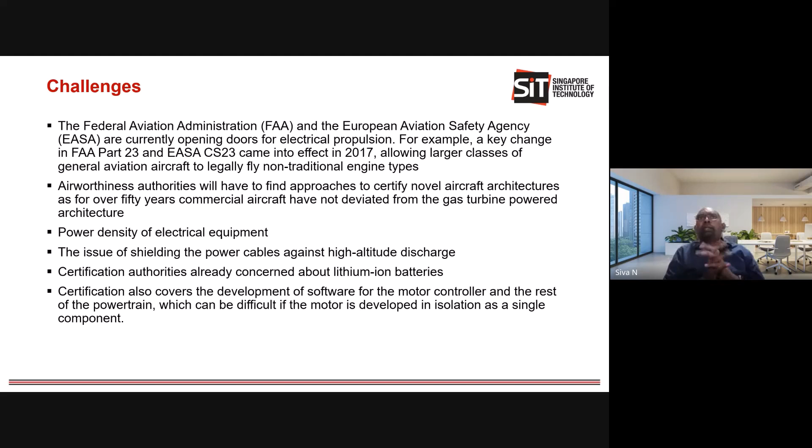So the challenges is that when it comes to the aviation industry, if you want to fly the aircraft in Europe or America, or anywhere, it has to be approved by the aviation authorities. The Federal Aviation Administration, FAA, and EASA, these are the two key aviation authorities. They provide the guidelines or the process to approve the aircraft that can fly for commercial application.

Currently they have the set of standards, the guidelines that basically provide guidance for the aircraft OEMs to follow in order to develop their product, and then they qualify and certify their product.

Since the industry predicted that more than two-thirds of the population will be living in the city, air taxi is something the industry would boom up. So this industry, the aviation administration and federations, they are upgrading the FAA Part 23, CS23, CS23A. The FAA Part 23 is the guideline for the safety and reliability of small aircraft, what they call the general aviation market.

They came up with standards in 2017 for small aircraft, which allow larger classes of general aviation aircraft to legally fly with non-traditional engine types. The traditional engine types are basically gas turbine engines or propeller-based engines.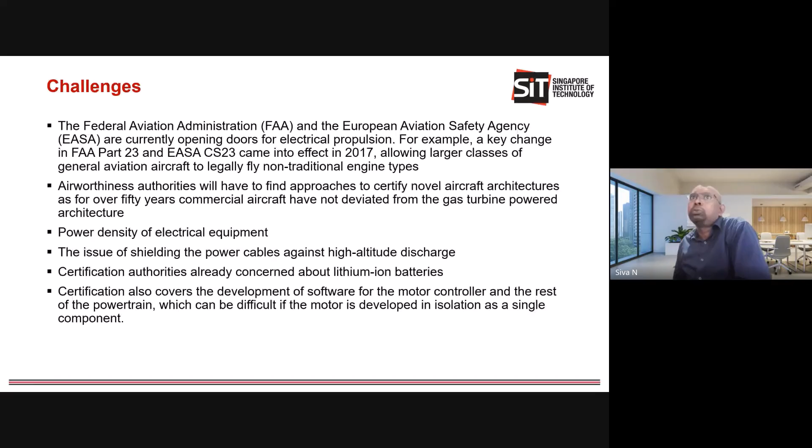These are the responsibility of airworthiness teams to define the process the team has to follow, because in non-aerospace applications, we design the product and then go to certification - we get certification based on UL or CE or DNVGL or ABS for marine applications. We take our product to the certification authority to qualify it based on standard requirements, and then they certify that this product is qualified according to the standard.

But when it comes to aviation aircraft products, before we design the product, we have to come up with the planning process - how I'm going to develop this product, what steps I'm going to follow, how I'm going to ensure that every code that goes inside the product is verified if it is safety critical. There's a planning process that they have to follow.

Before they start developing, they have to get the authorities to look at the planning process to get confirmation that this process is robust, it's fail-proof, and then the authority approves for them to go and develop the product, and then they go and certify or qualify the product.

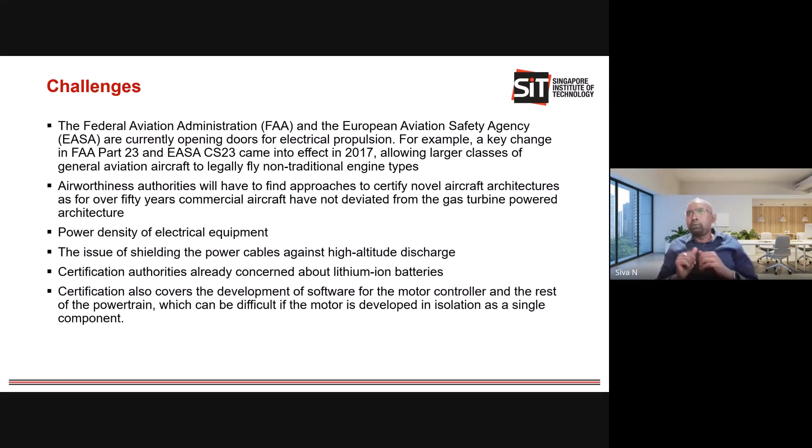So it's tedious - it's not that developing the energy efficient equipment is easy. Maybe you can do some trick to make it more energy efficient, but if it is not safety critical, it is difficult to verify the product according to the safety requirements. It may not be successful, it may not be certified by authorities to fly. So these are the challenges - they have to comply to the standards and the regulations that authorities put forth.

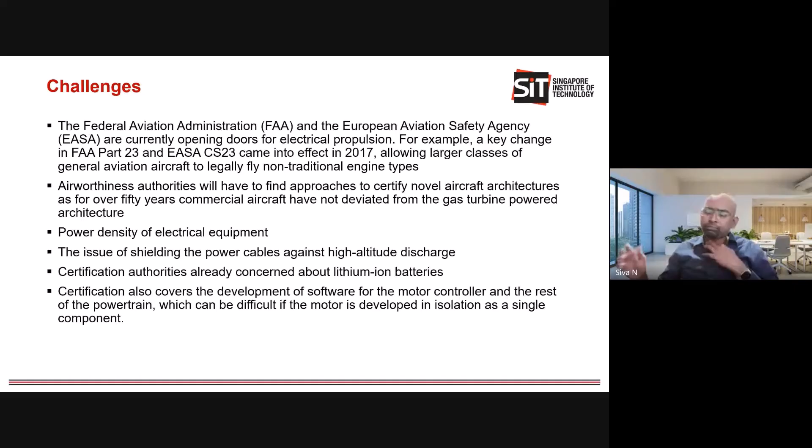Currently it's not very clear because authorities and the OEMs are working together to define these standards, but not everything is readily available for the OEMs to design and build products like motor or power converter or battery systems that will be 100% qualified to fly, because there may still be gaps to qualify, but industries are working on it. They have their own products to demonstrate to customers that they have the capability to design and develop.

If you want to make things smaller, one way in the electrical engineering approach is to increase the voltage to reduce cable size, and the other approach is to increase the frequency. So if you increase the frequency and increase the voltage, that can be done. That's a common approach to reduce the size of the power converter or electrical machine. But the challenge is that when you do that at high voltage and high altitude, the chances for discharge, partial discharge, or corona effect is very high.

So how are we going to mitigate that? These are some of the things that need to be addressed. It's not fully understood how the partial discharge or corona discharge would happen on the high voltage DC bus or high power density equipment where we have increased the frequency.

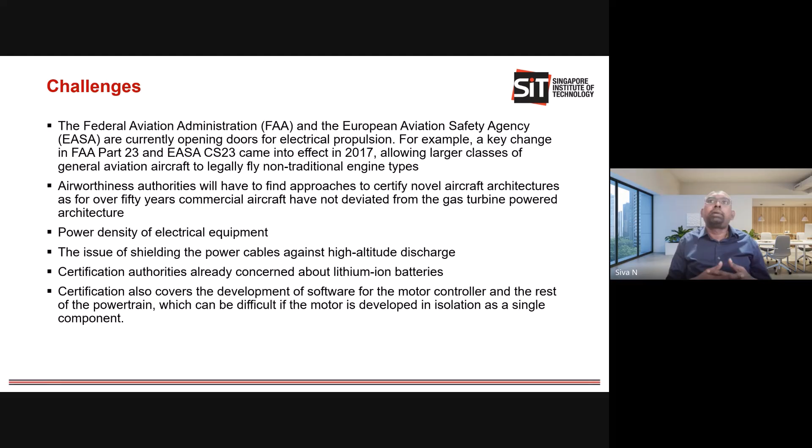Again, increasing the switching frequency leads to noise. How can we contain the noise, because aviation navigation equipment is sensitive to noise? How can we contain that? These are all the challenges that engineers are working together to solve, to make the electric aircraft certifiable and bring it into use for commercial purposes.

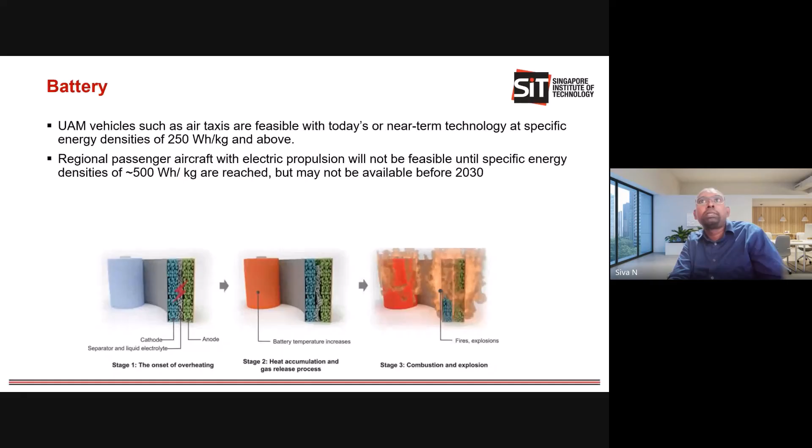Okay, so with that, I've finished my lecture, this presentation. If you have any question, please feel free to put it in the chat or feel free to ask.

Dear participants, hello. Sir, in chat some questions came, you please check. Okay, alright, let me look at the chat. What metrics or benchmark are used to determine if an organization or country is on track for net zero?

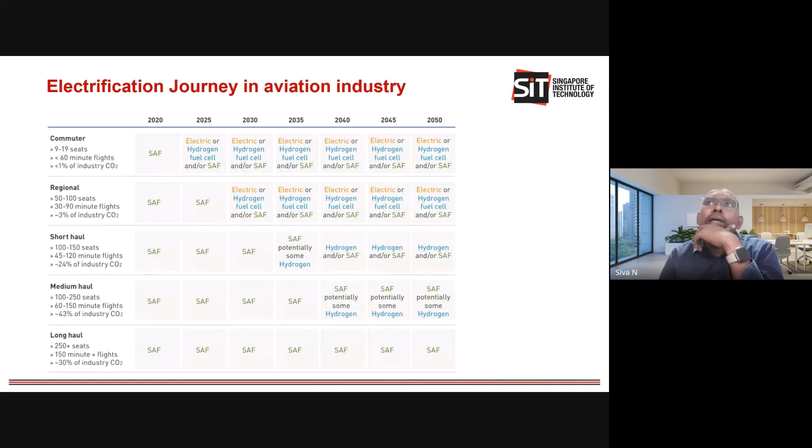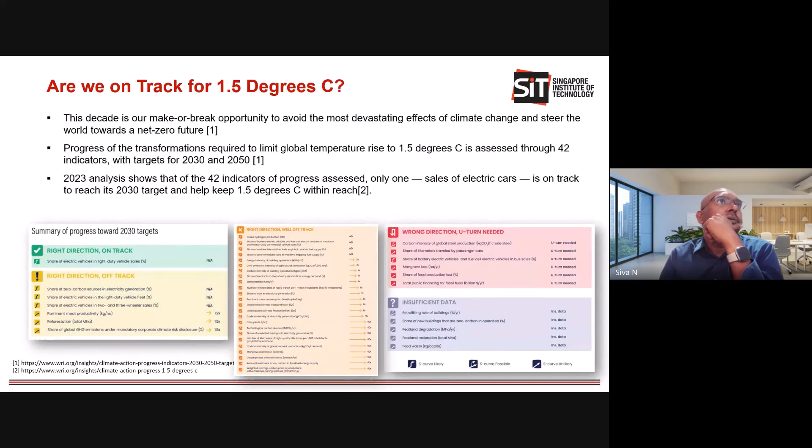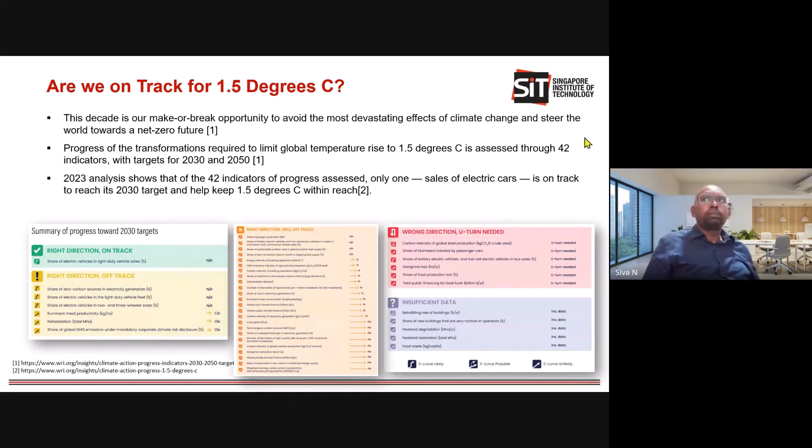Okay, I think this question is a bit tricky. What metrics or benchmark are used to determine if an organization or country is on track for net zero? Actually, this is what countries use - as I mentioned, they have policies, and then they track. I think, yeah, so they have the policy. For example, I can talk about Singapore.

Singapore set a target saying that they have a harbor craft - they call it a harbor craft. A harbor craft is a small vessel or boat that goes around Singapore, because Singapore is one of the busiest harbors in the world. It serves many large ships. They have about 1,500 small and medium boats - smaller than the larger vessels. These are currently operated with diesel or petrol.

So they set the target saying that by 2030, all new harbor craft - the small boats that will be launched and entering Singapore waters - should comply with net zero, meaning they should either be fully electric or use fuel that is carbon neutral. That's the kind of metric, the target that they set, and they track how well they are doing it. That's the kind of metrics they use to track whether they are achieving the net zero target.

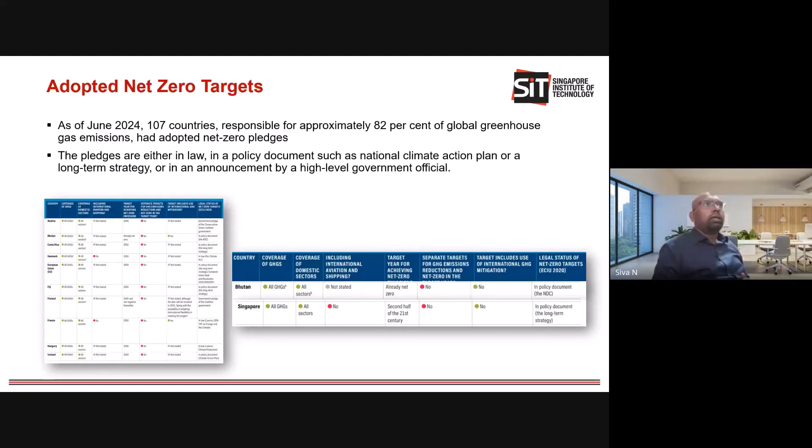And for companies, some of the companies, like the ones I worked for before, say that by 2030 the emission that comes from the factory will be reduced by 50%. That's the kind of target they set, and then they have their own metrics to track whether they are achieving the target or not. So these are the different milestones that they set, and they track the progress.

Okay, so any other question? Any other question, please? Sir, I think there is no question. No question, okay.

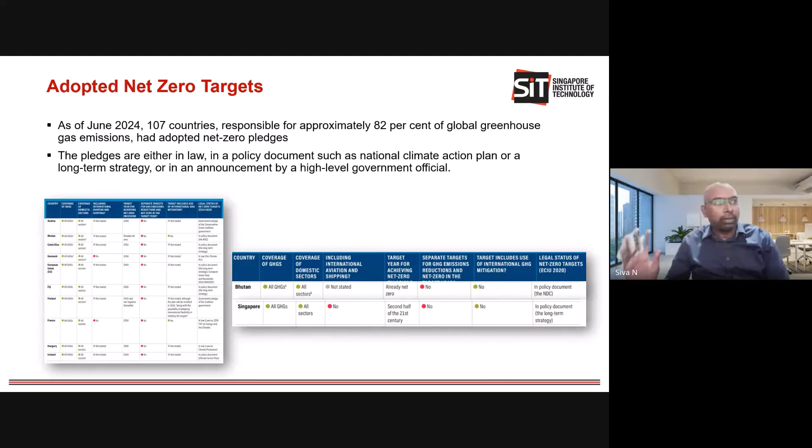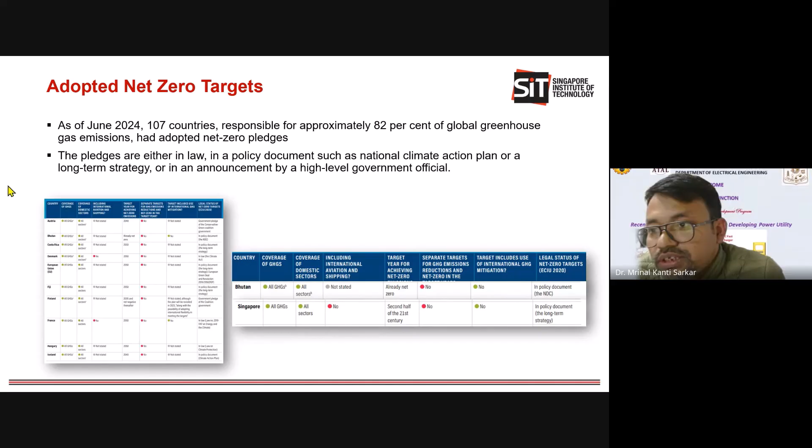Okay sir, good night, thank you sir. Thank you, bye bye, bye sir. Bye.